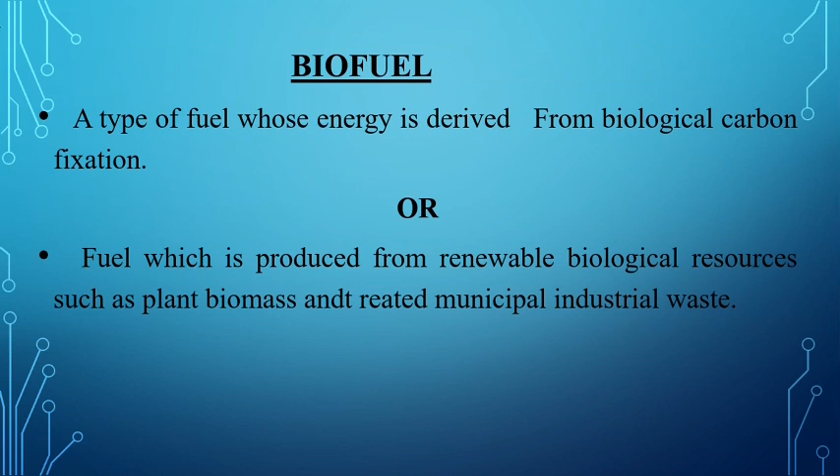Today's presentation topic under the course MIBO 111 Introductory Microbiology is biofuels. So, what is meant by biofuel? Definition of biofuel: a type of fuel whose energy is derived from biological carbon fixation, or fuel which is produced from renewable biological resources such as plant biomass and treated municipal industrial waste.

Why use biofuels? Fossil fuels are limited. To reduce dependency on fossil fuels, to reduce reliance on oil, to lower emission of greenhouse gases, and to bring business to rural economies.

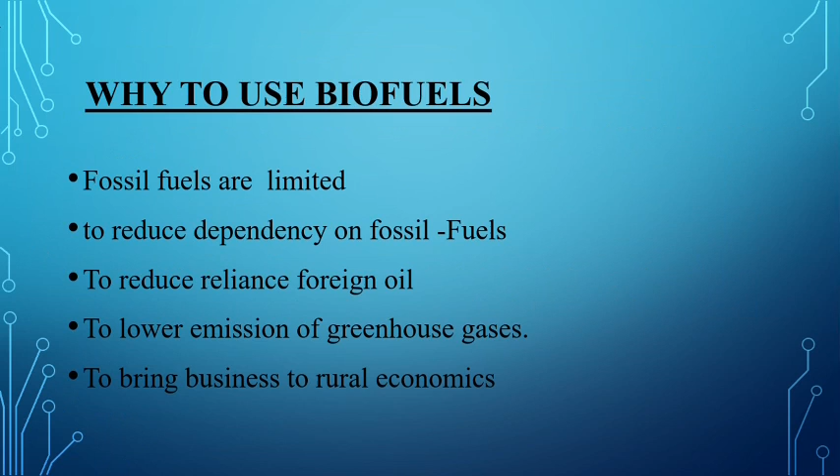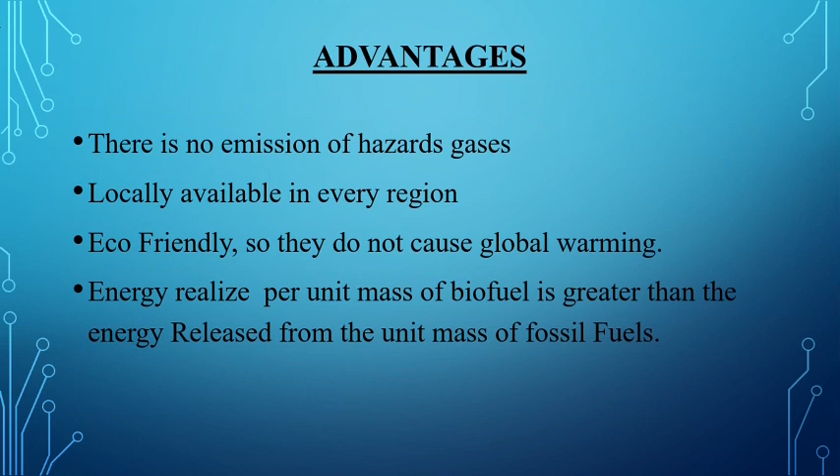Advantages of biofuel: there is no emission of hazardous gases, locally available in every region, eco-friendly so they do not cause any global warming, energy released per unit mass of biofuel is greater than the energy released from the unit mass of fossil fuels.

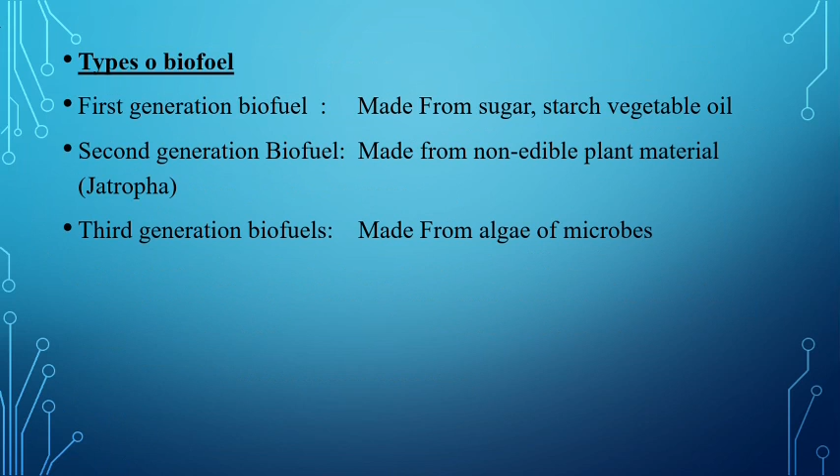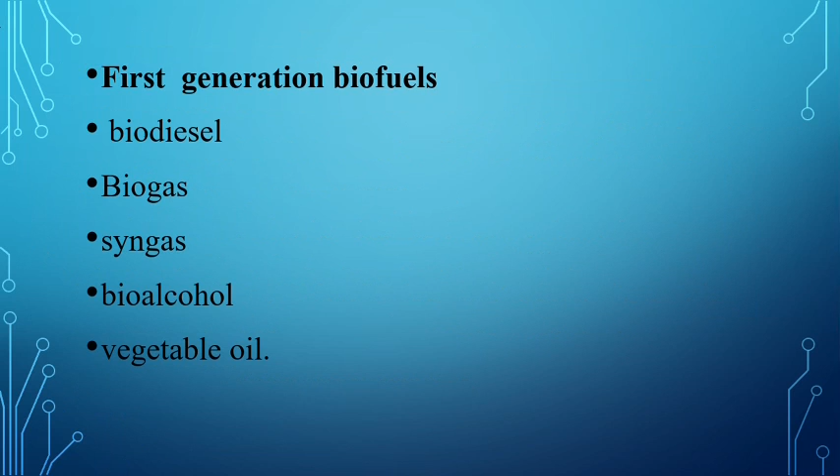Types of biofuel: first generation biofuel, second generation biofuel, and third generation biofuel. First generation biofuels are made from sugar, starch, and vegetable oil. Second generation biofuels are made from non-edible plants like jatropha. Third generation biofuels are made from algae or microbes. Some examples of first generation biofuels are biodiesel, biogas, syngas, bioalcohol, and vegetable oil.

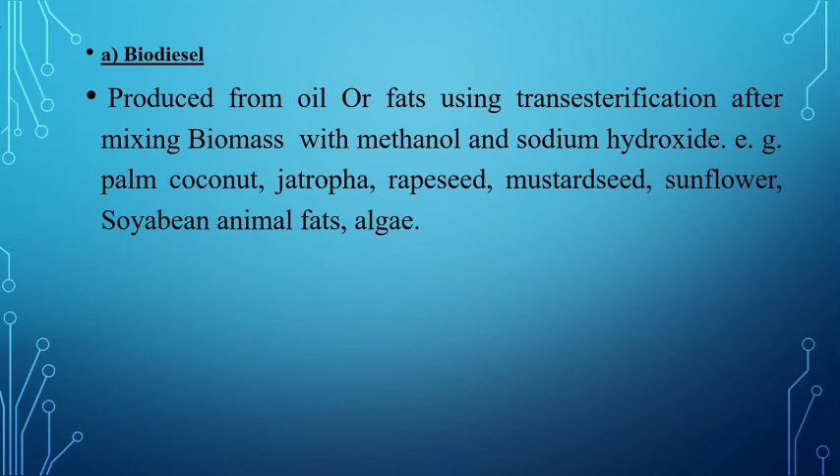First one, biodiesel, produced from oil or fats using transesterification after mixing biomass with methanol and sodium hydroxide. For example, palm, coconut, jatropha, rapeseed, mustard seed, sunflower, soybean, animal fats, and algae.

Advantages of biodiesel: it is called a clean fuel. It does not contain carcinogens. It possesses high biodegradability and lubricating property, improves engine efficiency and operating life cycle. Readily mixes with petroleum diesel fuel in any ratio. Safe in transport and storage.

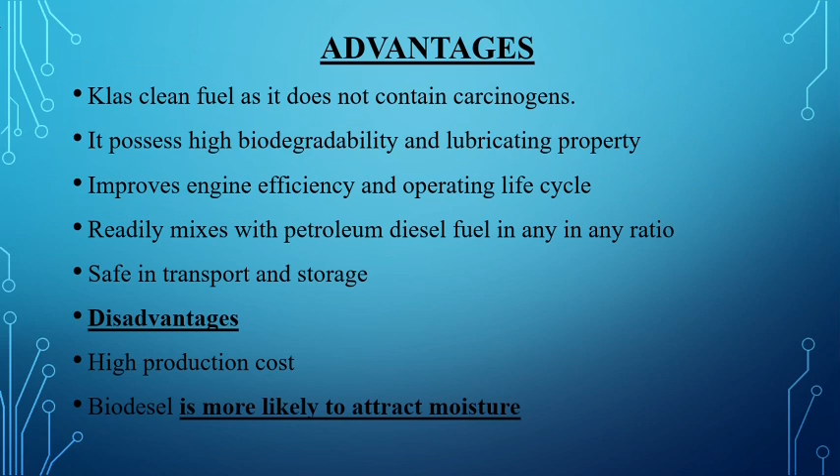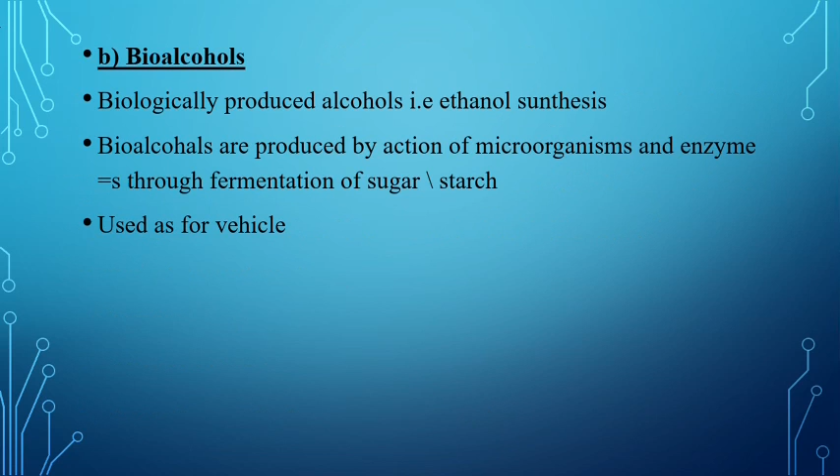Disadvantage is high production cost. Biodiesel is more likely to attract moisture. That's why this is the important disadvantage of biodiesel. Then bioalcohol: biologically produced alcohols are called bioalcohols, for example, ethanol. Bioalcohols are produced by action of microorganisms and enzymes through the fermentation of sugar and starch, used for vehicles.

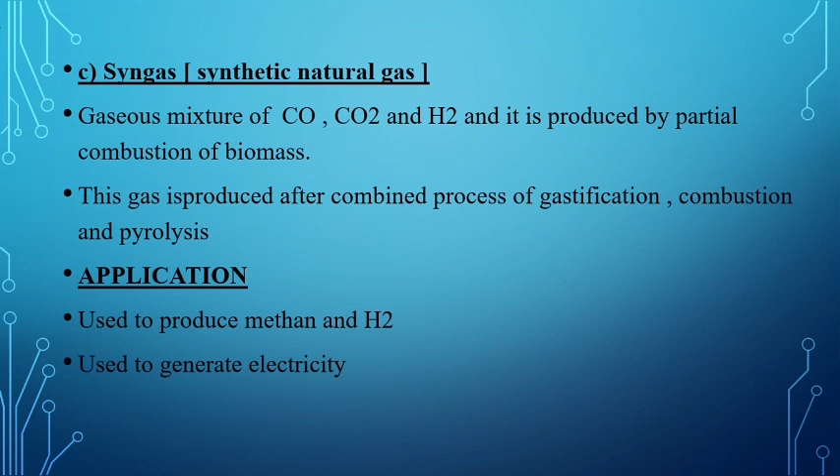Syngas, a gaseous mixture of CO and H2. It is produced by partial combustion of biomass. This gas is produced after a combined process of gasification, combustion and pyrolysis. Application: used to produce methane and H2, used to generate electricity.

Then biogas. Biogas is the mixture of methane, hydrogen, H2S, and nitrogen, produced from anaerobic digestion of animal and plant waste. Biogas is produced in three stages: hydrolysis, acidogenesis, and methanogenesis. In hydrolysis, enzymes degrade complex carbohydrates, proteins, and lipids. Then in acidogenesis, hydrolysis products are converted into acetic acid, hydrogen, and CO2. Then methanogenesis, when obligate anaerobic bacteria control methane production.

There are two types of biogas production plants, that is fixed dome and floating dome. Some bacteria involved in biogas production are Bacillus, Methanosarcina, and Methanobacterium. Optimum pH for methane production is 6.8 to 7.2.

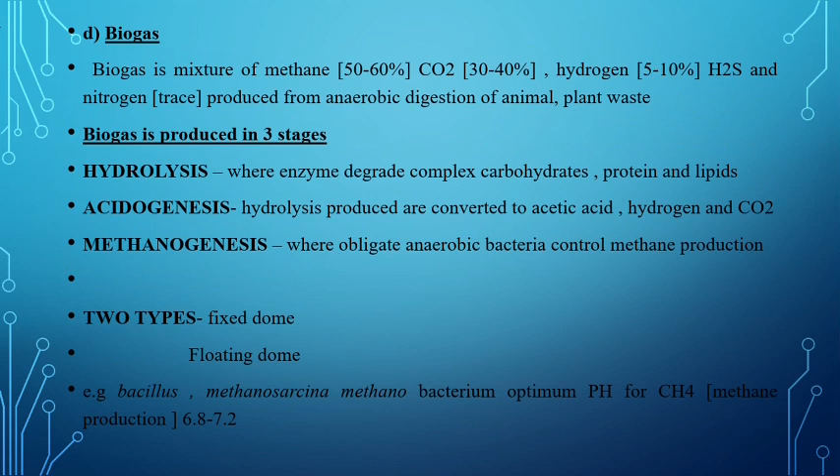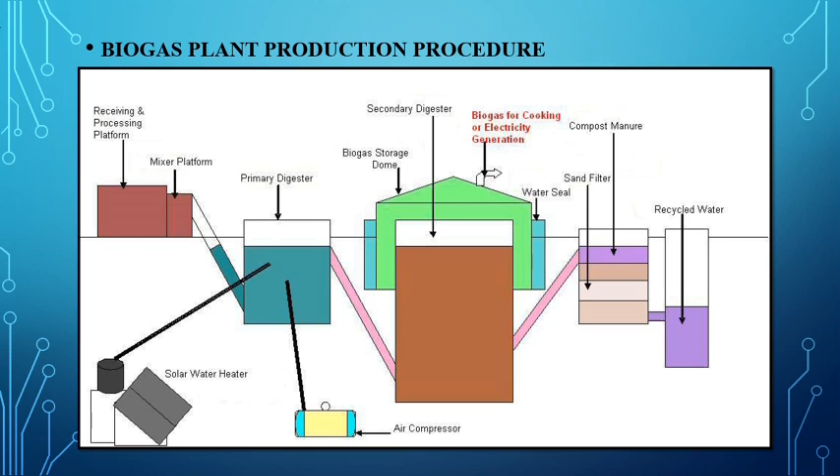Next, this is the biogas production plant, and this is a fixed dome biogas production plant. An equal quantity of waste, meaning plant, animal or industrial waste, and water is mixed to prepare slurry, and this slurry is prepared in the mixing tank. This brown color is the mixing tank. Through the inlet, the slurry is inserted into the digester.

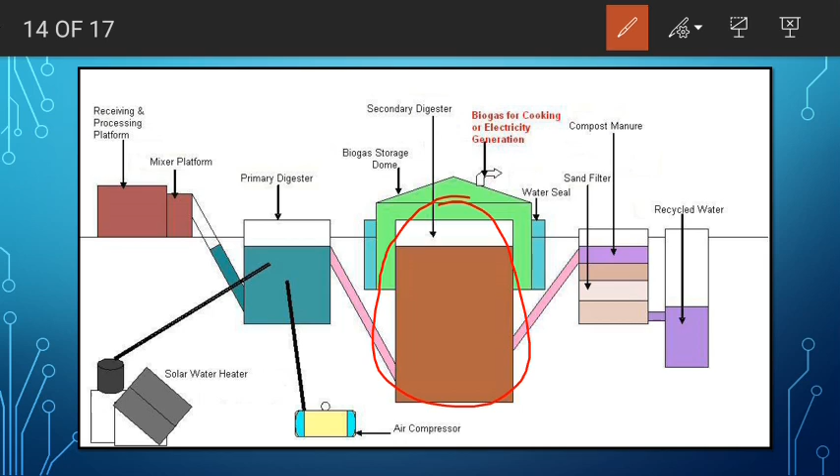This is the mixing tank, then the primary digester. Slurry is inserted into the digester. When the digester is partially filled with the slurry, introduction of slurry is stopped and the plant is left unused for about 2 months. During this period, fermentation and decomposition take place by anaerobic bacteria. As a result of anaerobic fermentation, biogas is formed and gets collected in the dome.

As more and more biogas starts collecting, pressure exerted by biogas forces slurry into the outlet. This is the biogas collecting under pressure in the dome, this brown color dome. From the outlet, slurry overflows into the overflow tank. Slurry is removed and used as manure. The slurry end product is used as manure and biogas for electricity, or use in the kitchen also. So this is the biogas production plant.

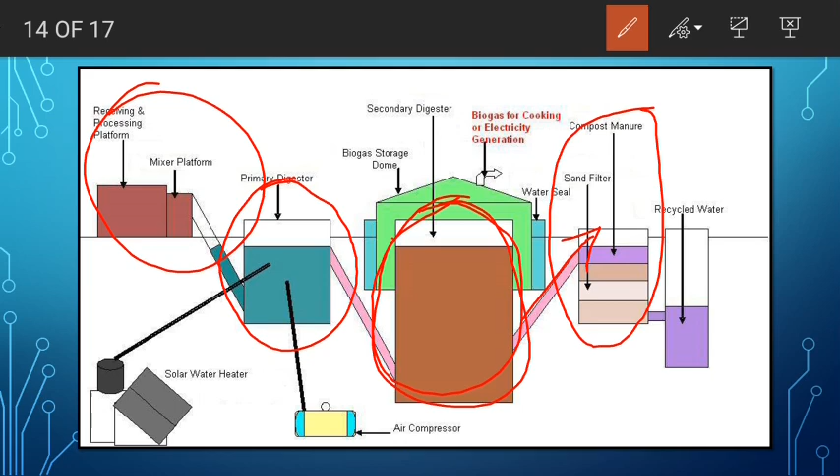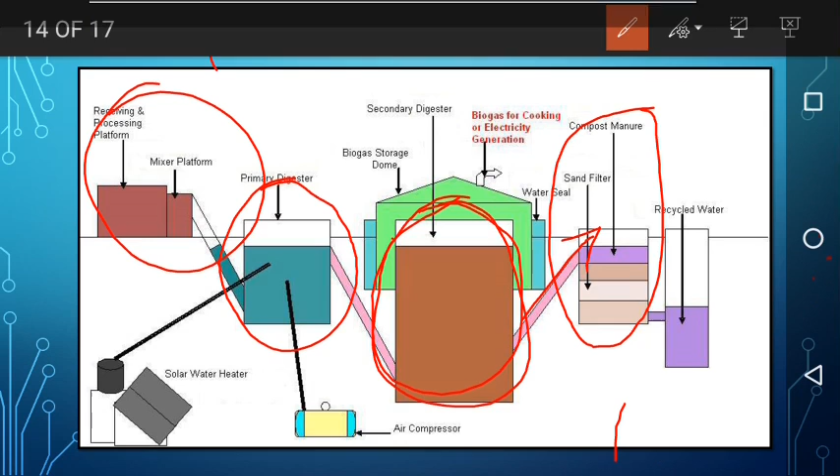Next, this is the procedure we already told you. Read carefully and listen carefully to this video; this biogas production plant and its procedure is very important for the final examination, and every year this question is asked for 4 marks as a short note on biogas production.